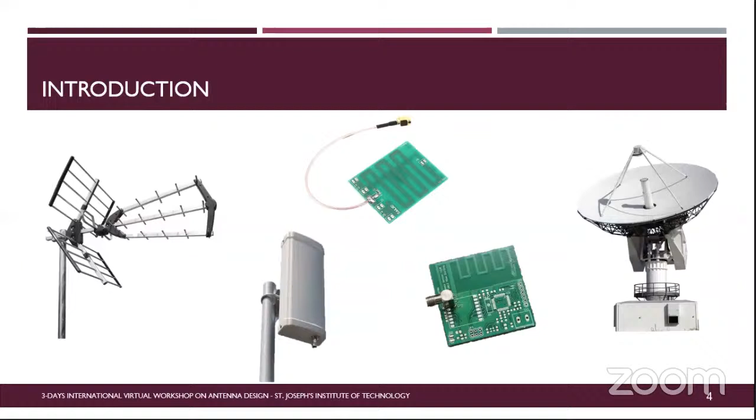So when we are talking about conceiving an antenna, what should I think of? So at least in my experience, the main parameter, of course, that we are going to look at is the design. So, do I need a big antenna? Do I need a small one? Can it be square? Should it be a circle?

So I should think about the physical dimensions of my antenna, and also the design is responsible for the other parameters, which are the frequency. So which frequency do I need my antenna to work on, and the bandwidth, in which frequency range I want my antenna to work. Is it going to be a broadband antenna that works in a very large frequency range, or should it be a very specific frequency range that I need it to work on?

And also the radiation pattern, which is the spatial distribution of a quantity that can characterize the electromagnetic field generated by the antenna, which is usually expressed as a mathematical function or a graphical representation. Then I'm going to show some examples for you. And the quantities that are most often used to characterize the radiation from an antenna are proportional to or equal to power flux density, radiation intensity, directivity, phase, polarization, and field strength.

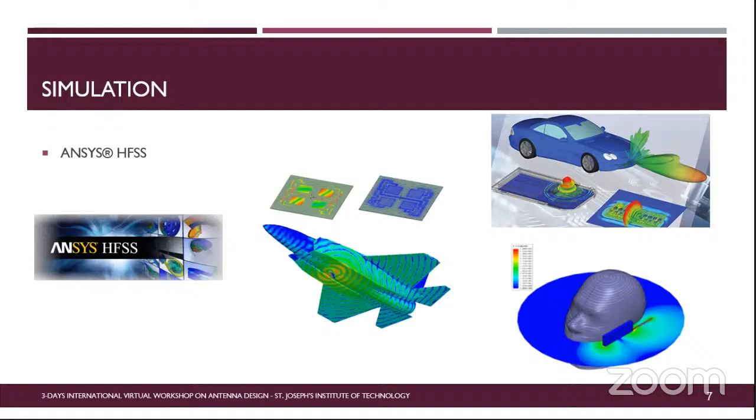So there's a lot of possibility, and it's a very complete software that you can explore and search for what you need. For example, here, if you want to design an antenna, you can use the HFSS antenna toolkit, which has a lot of types of antennas that you can choose from. Then you put your parameters here, and it's going to synthesize and make the antenna for you.

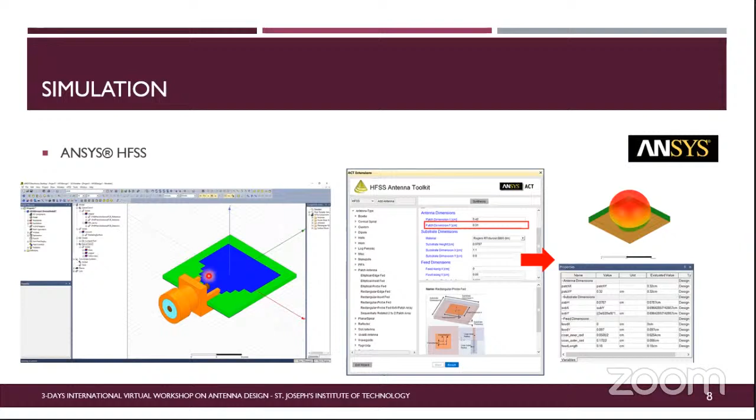But if you need a very specific antenna design, you can do it from the bottom with the elements, the cube element, the sheet element. So you can design it yourself with your CAD talent. So this is the first part, which is designing your antenna.

After you have your antenna ready to go, here is the menu on the side of the antenna, where you have all the information your design needs. For example, the excitation, where the feed is going, in this case here. And then we have the setup, so you can put the frequency you are working with, and the sweep, so which frequency range you need the analysis to be done.

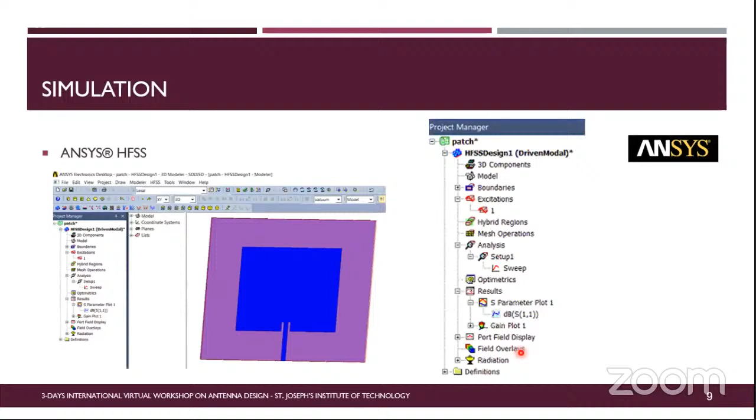And then you have the results, where you can plot a lot of different results. Here we did the S parameter plot, the S11, and gain. Also, we can plot fields, and I'm going to show you a little more in the next slides. For example, here we have the gain plot. In the results you can have a lot of different results, and in the far field report, you can have this gain report.

And you can see how your antenna is working, the radiation pattern, of course, in 3D, but you can also have a 2D representation. And you have a lot of other options here that I never used, but I'm still searching and still learning to use this software, even though I have a lot of work done in it. For example, in ANSYS you can already plot the FFT of your answer. If you have an S11, you can plot the FFT and see how the frequency range is distributed in your design.

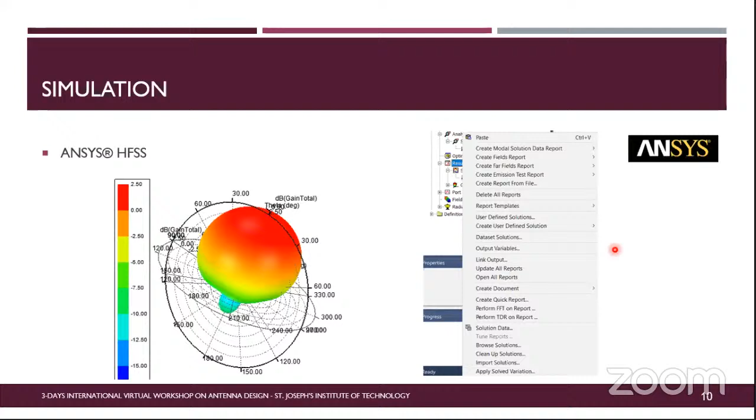And we have a lot of options. Here we have the gain. Also, we can put this gain on the antenna design, so we can see graphically how the antenna is propagating its power, its signal, and receiving, of course. So here, for example, is a patch antenna. You have the gain normal, 90 degrees from the antenna plane, as expected. And the back lobe here is very small, so it's a good antenna, let us say.

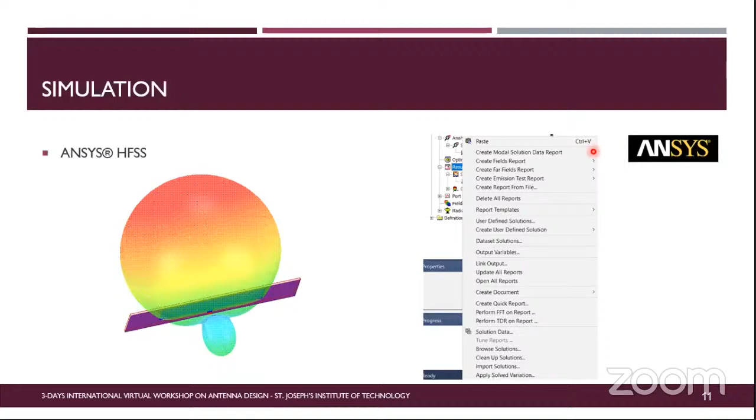And also, for example, when you make a solution data report, we can plot the S parameters. Since here it was an antenna, I have only the S11, but if I had 2 ports, I could plot the S21, and with 3 ports the S31, and all those S parameter options for the ports. We can also plot the impedance parameters and all those parameters that you may need in your project.

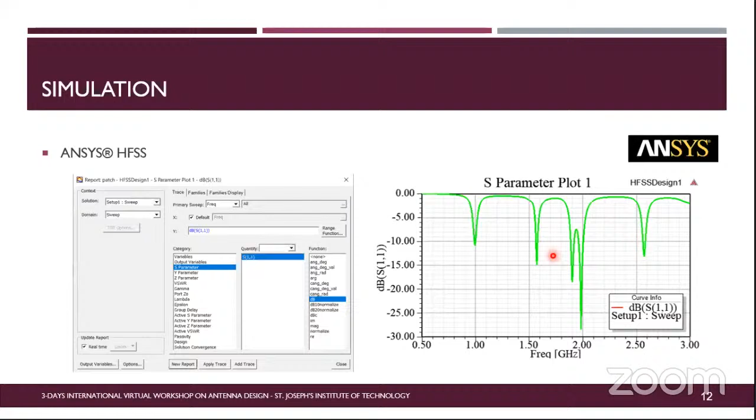So for example, here we have an S11 parameter, and we can then make the analysis. What do we need? What is the resonant frequency? So we have an example of the S11 that we can plot with HFSS. Another thing that we can do in this software is to plot, for example, the field of the antenna.

So now I believe I'm going to show you a little tutorial of ANSYS. Let me put it here.

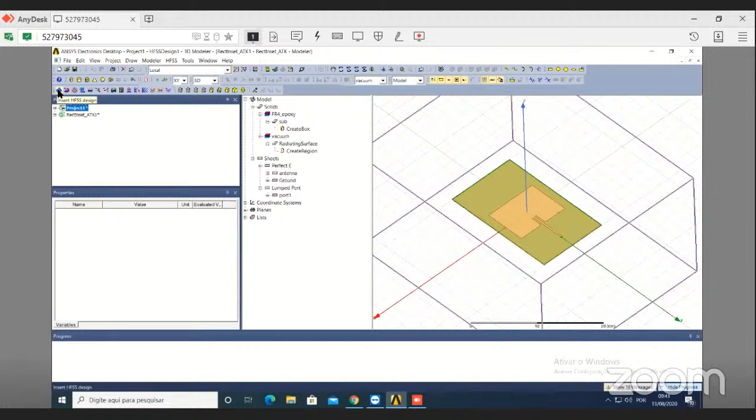So here we have the ANSYS software, and we have already an antenna here. I'm gonna show you how to make this antenna from the beginning. So you open your HFSS software, and you can have a lot of different circuit designs here. But we are going to do a 3D design, electromagnetic design. So we're gonna choose this option here, HFSS design.

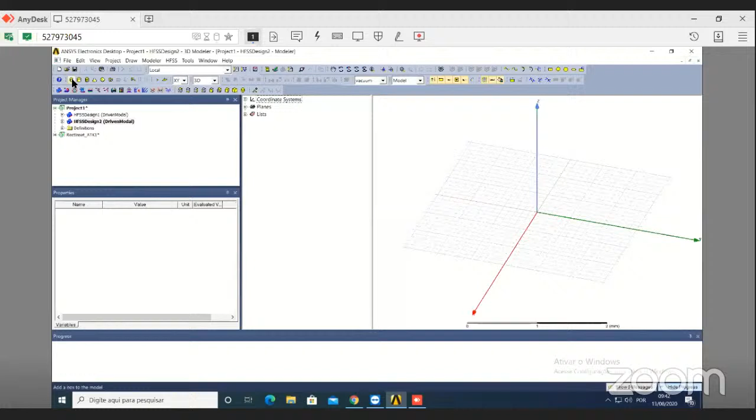So we have the clean page here with the axis, and we can, for example, begin our project from the bottom. We can use those elements, for example, here a box, a cylinder, a regular polyhedron, and a lot of other tools. So for example, here we have the 2D elements, a rectangle, a circle. And for example, if we need to do a substrate, we can have the box and we just draw here. So it's a CAD work here. So we can do that.

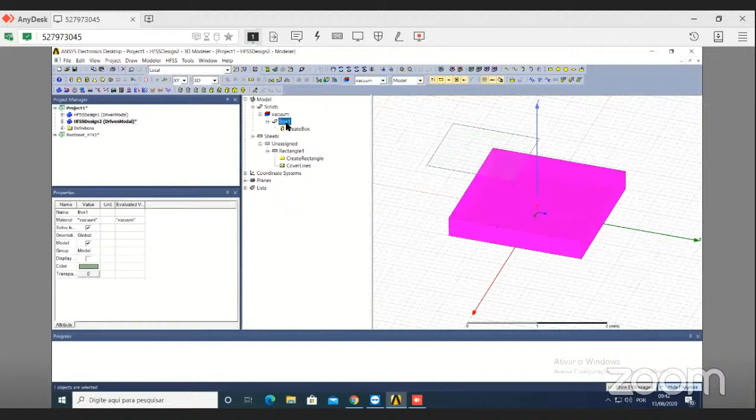And then if you need a copper layer here on the top, you can use the sheet, and then you have to place it here. And to do that, what I learned to be the best is to give variables to all your dimensions. For example, if you have a rectangle here, it's your substrate. So here you have all your elements, and here is the box one, which is your substrate. So you should name it here substrate, so it's easier for you. And then you can choose here the material.

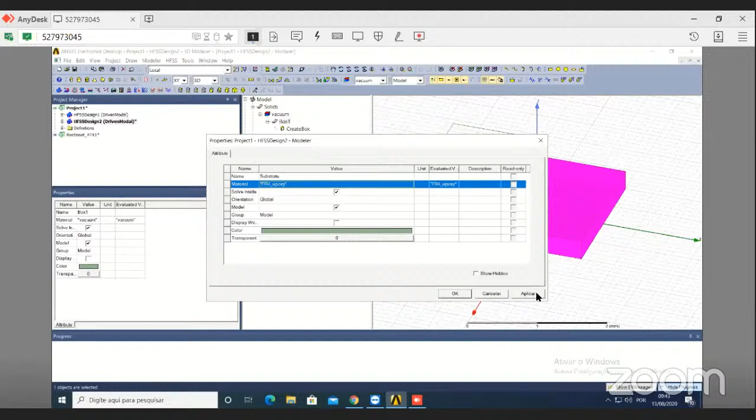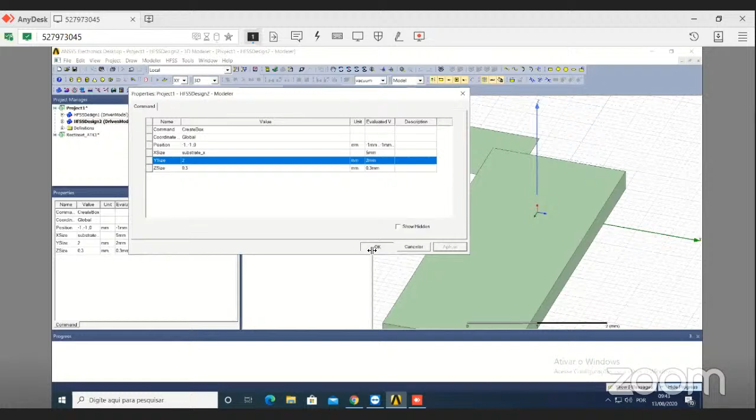And for example, if you're gonna use FR4, which is the most used in my case, we just put it here. And then here you can make the dimension of X size. We can use a name like substrate X, and then you put the length, for example, 5 millimeters, and it's gonna change your design. So you put the positions and the sizes, and so you can have control of your design.

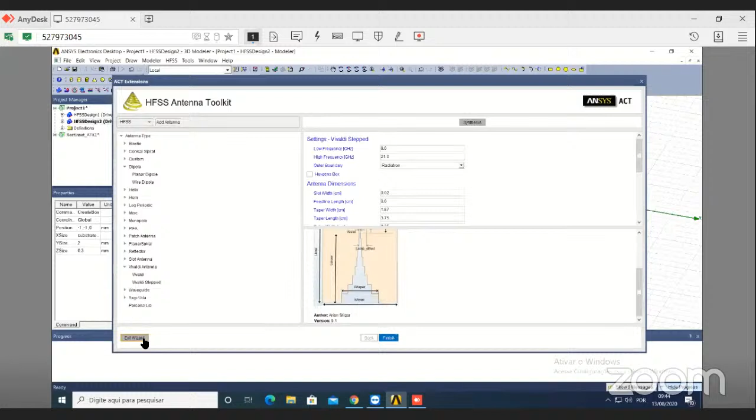But today, if I'm gonna do this from the bottom with you, maybe I'm gonna take a lot of time. So we're gonna use a tool, we're gonna put here ACT antenna toolkit, which we have here. When we open the ACT extension, we have the antenna toolkit here. We have other toolkits, but we're gonna use the antenna toolkit as I showed in the presentation. And we have here a lot of antenna types if you need one of them.

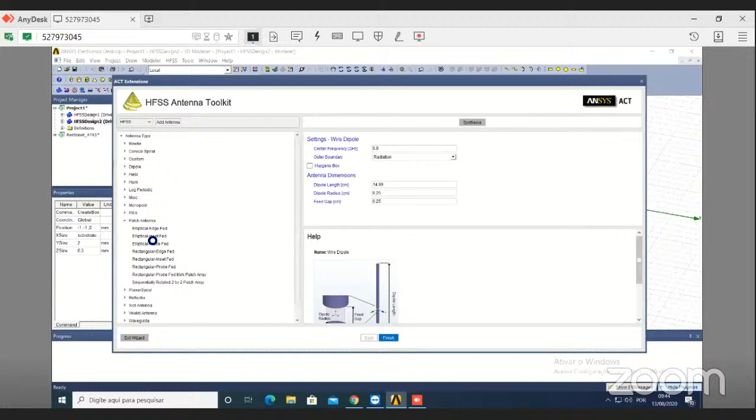For example, if we're gonna design a patch antenna, we can choose from a lot of kinds of antennas and feed options. So let us wait. For example, here I'm gonna use a rectangular inset fed antenna, a microstrip. So here's the model, and I need an antenna, for example, for my RFID. The RFID standard here in Brazil is 915 megahertz. So it's in gigahertz, sorry. So there you go. And then outer boundary radiation, okay.

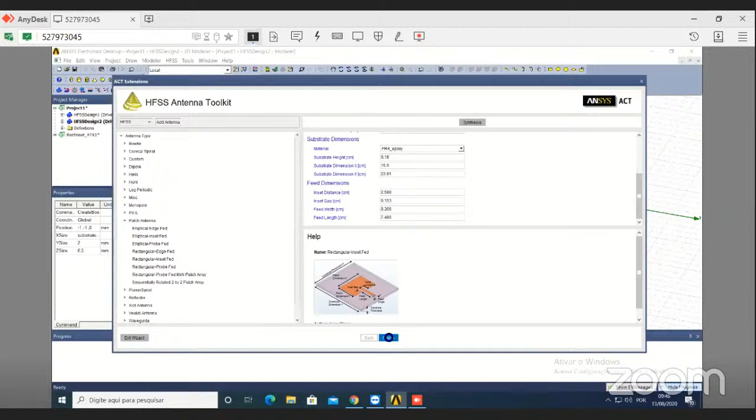And then let's choose the material here. I'm gonna do an FR4. And the height of my material, which here is 1.6 millimeters. And then I can put here synthesis, and it's gonna calculate all the dimensions for me. And then I click finish. So it's gonna do its job. As you can see, there is a lot going on.

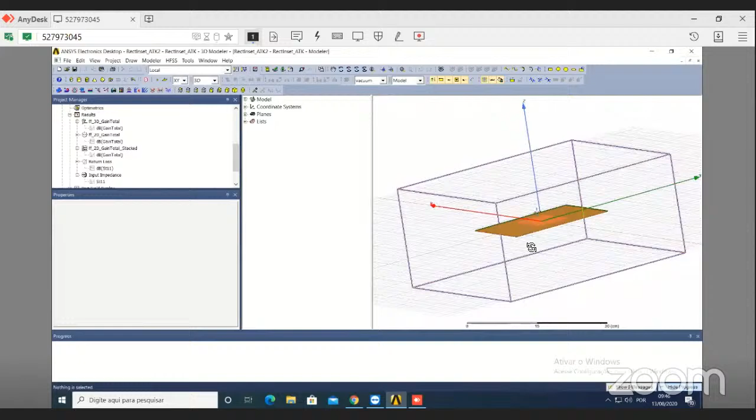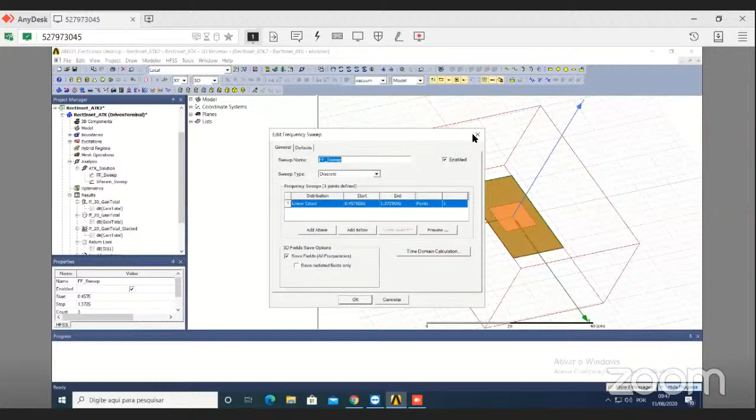And it's done. So here it is, the antenna that the software did for me, and it doesn't do only the antenna, it does all the simulation setup for me. For example, here, if we go here in analysis, it did the solution setup and S parameter sweep from 0.45 gigahertz to 1.37 with 100 points. And it also did a sweep here with 3 points to see the antenna gain characteristics, a fast frequency analysis here. And then we have the results.

It's already plotted here, but to see those results, we should simulate it. So let's just put here and analyze. Let's wait. While it's simulating, we can see all the plots it has done. Here is the gain. We're gonna see the gain after it's done simulating. And then we're gonna see the gain in different frequencies. And then actually here is the radiation pattern in 2D. And then here it is in the different frequencies.

And then we're gonna see the return loss, which is the S11 of the antenna. And then the input impedance with a Smith chart. So it's some options of what the software can do. And another thing that we can notice, I'm gonna wait until it's done. But if we click here, we can see that all the design is with the dimensions in variables. For example, the patch X dimension is here. So if you change the value here, it's going to change in your design. After the simulation, we're going to show it. And the patch Y is also here.

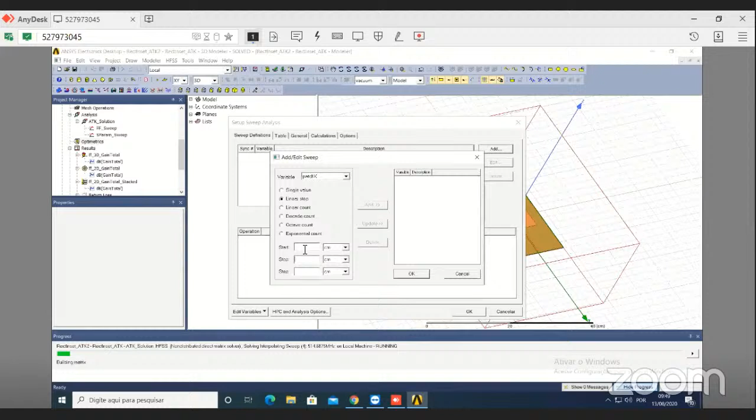And then we have the variables divided by categories. And the substrate, the feed dimensions, so we can change them based on our requirements. We can also do an optimization of those variables using this Optimetrics tool, where we can use optimization, automatic optimization, or we can see all the results from different parametrics. For example, patch X, we can put a range here and see the results for each variation.

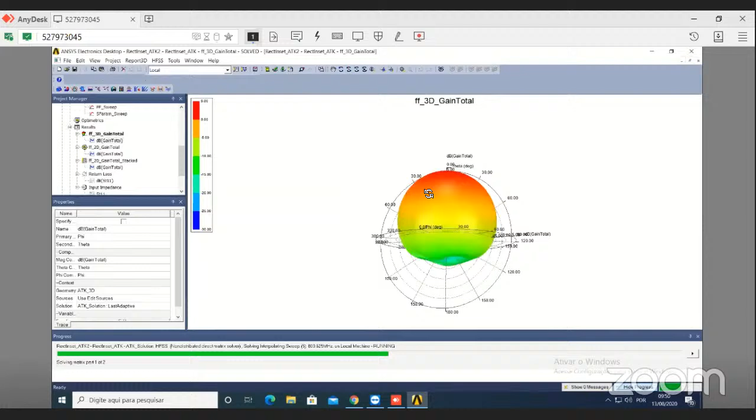So I believe it's done, the first one. Let's see the gain. Here we have it, the 3D gain. We can also have the 2D in 0 and 90 degrees. You can plot whatever angle you need when you click in the design. You can see this. And we can also have here the gain in different frequencies. For example, here in almost 500 megahertz, we have the radiation pattern in 2D.

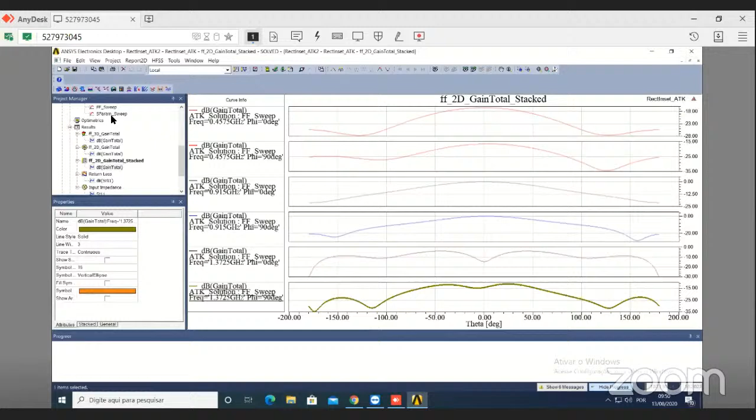And we can see all of it in 0 and 90 degrees for 3 frequencies here, but you can also change those parameters in the setup here. And for example, if you want different degrees, you can select the graphic, and then you can change here, for example, the families and the trace. So there are a lot of possibilities.

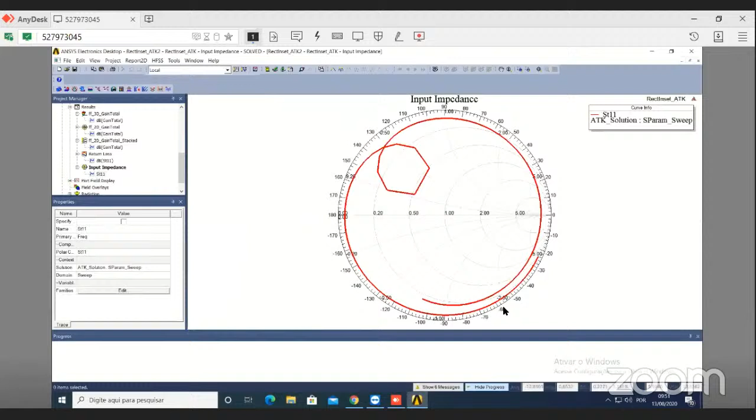The S11 here, as we can see, is not a very well matched antenna, but we can change it by changing the design, and also the input impedance here in a Smith chart. Here, as I was saying, you can change the design parameters by changing those dimensions. For example, here we have 7.8 patch Y, and if you choose, for example, 8.5, it did something here, but maybe it was not noticed.

Let us change to 10. So you can see that it makes its change here. Patch Y, we can, for example, set 8. So you can change all the parameters here and then simulate it again and see the results and do your project development. So let me go back to my presentation.

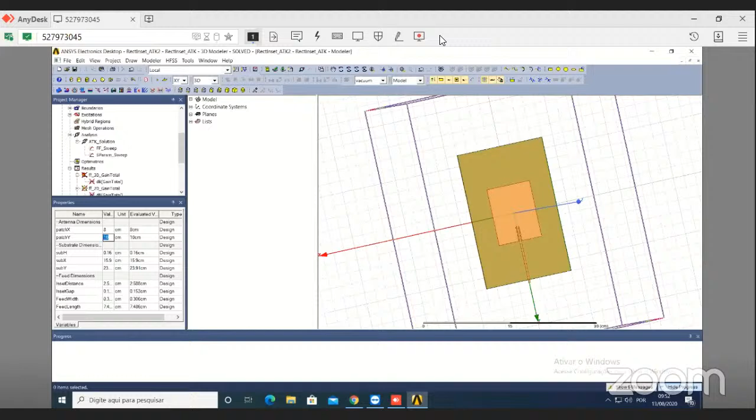So after all this simulation process, you have your antenna ready in the simulation part. It's working as it should. You're going to manufacture it. So at least for me, the most common fabrication processes are the automatic PCB manufacturing machines and the etching process, which is, I believe, the one that we use the most. And it's simple to do because anyone can do it. You don't need a machine to do it.

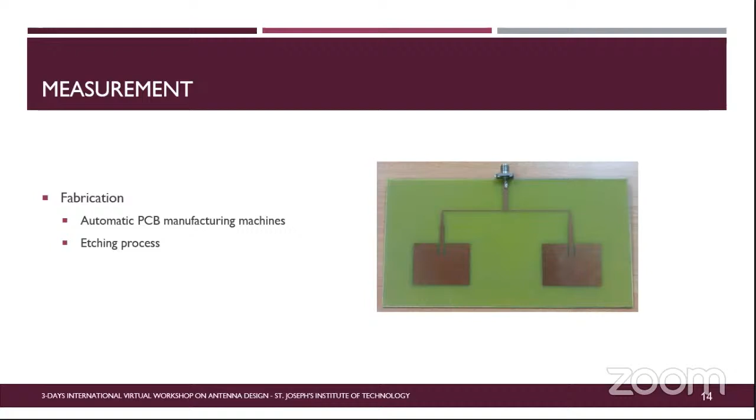So, for example, here we have a simple microstrip antenna. Actually, those fabrication processes I'm talking about are for microstrip antennas, because if you're going to do a bigger one, you will maybe need other fabrication methods. But for microstrip antennas, we usually use those two. And after you have your antenna manufactured, you're going to measure it. So here I'm going to show you some equipment, the most used equipment to measure the antenna performance.

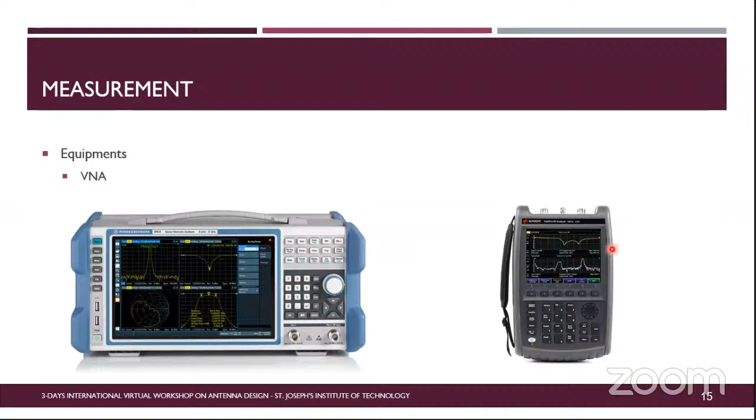Here, for example, we have two. The first one is a bigger one that we usually use in our laboratory. And the second one is the portable one that we also use. But these are some examples. Also, we have the spectrum analyzer and the RF signal generator, which are usually used combined for measuring antenna parameters.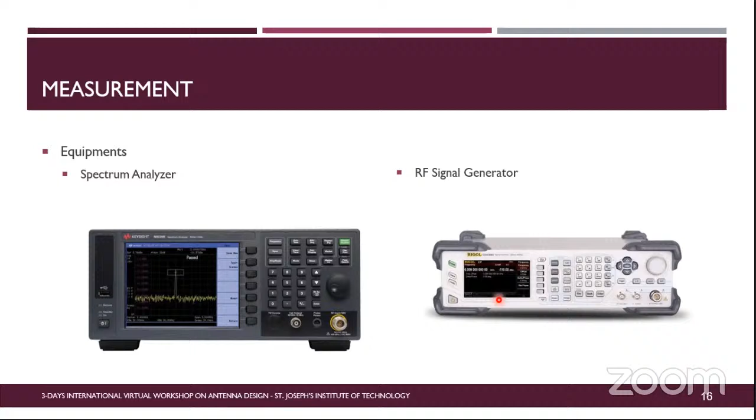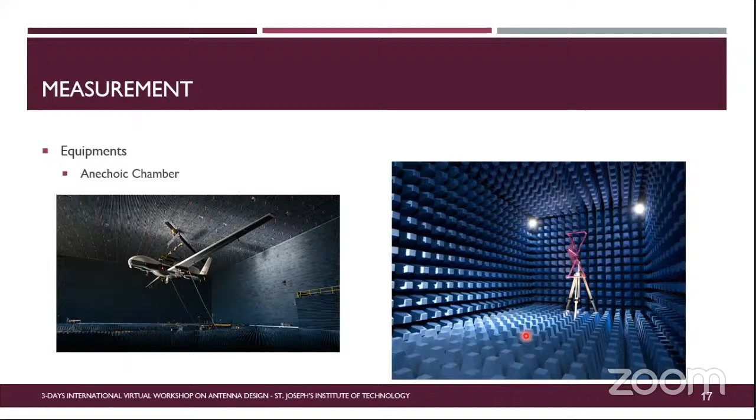And we can see those blue elements here are the absorbers. So this chamber, as I said, absorbs reflections. So you have exactly what the antenna is sending and receiving. You don't have reflection effects on your measurement.

And to measure the antenna design and performance, usually the parameters that we measure are the S11, the reflection coefficient, and the transmission coefficient, which is the S21, or if you have more than 2 ports, S31, S32, and so on. And also the gain, which is usually linked to the S21 if you use the Friis formula.

I'm gonna show later. And you take the data in a CSV file or S1P, S2P file, and then you plot and see the comparison with your simulated and measured results. And also the gain, usually you plot in a polar plot. So the vertical and the horizontal is the co and cross polarization. As I showed in the HFSS, you have the 0 and 90 degree of phi axis.

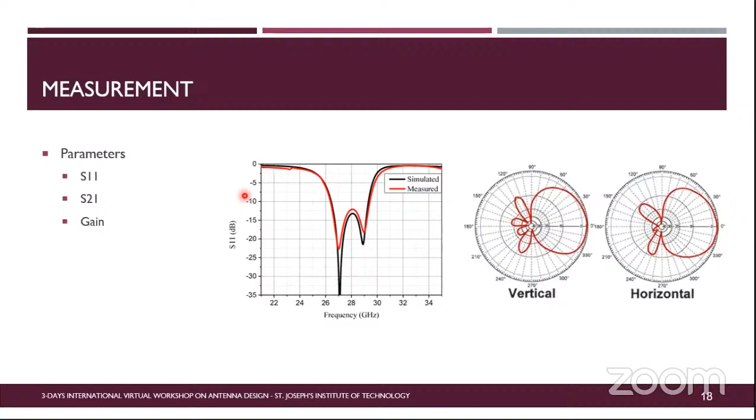Depending on this level, we can see if the antennas are working fine — if the sending antenna is okay, and if the receiving antenna gets all the power sent by the first antenna. And if we had another antenna connected to the VNA as port 3, S31 would be the power sent by antenna 1 and received by antenna 3.

And S32 would be between antenna 2 and antenna 3. So it's a parameter used to measure the transmission and reflection of antenna performance.

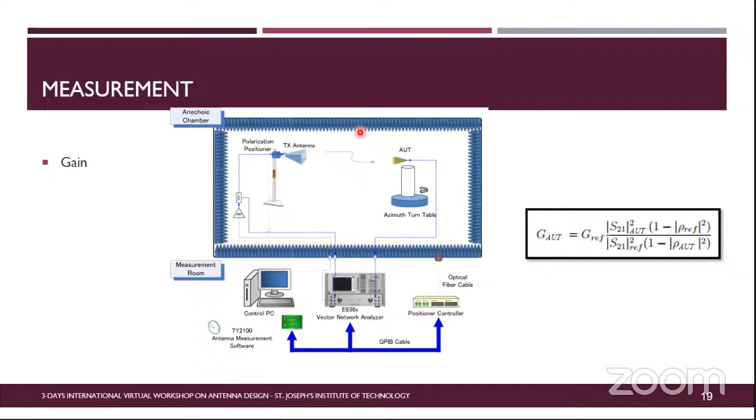Thank you once again. Thank you for the invitation. It was a pleasure to be here today with you. I hope I could help and share a little bit of what I use and what I know. Maybe we can meet in person in future APS events or collaborate virtually. Sure, ma'am, you are always welcome to our campus.